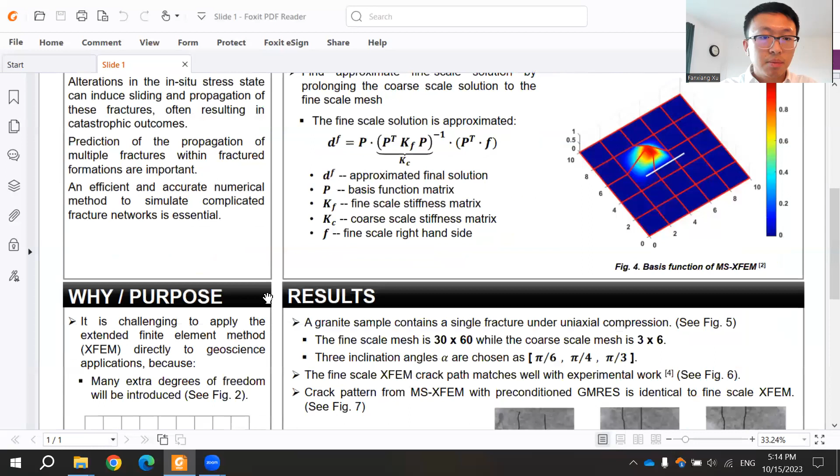There are still some challenges involved in simulating the fracture networks. Normally, for these complicated fracture networks, we prefer to use the extended finite element method, or XFEM. Since it is a very efficient strategy, it allows us to use simple structured grids, like shown in figure 2 here, to simulate very complicated fracture networks. But there are still some challenges involved if we want to apply XFEM directly to geoscience applications.

Because in XFEM, extra degrees of freedom are involved in the final solution system, as still shown in figure 2. These mesh nodes with the markers on top of them are called the enriched nodes, and they are affected by the fractures. So to capture the discontinuities due to these fractures, we give extra degrees of freedom to these enriched nodes.

When the number of fractures becomes huge, as is often the case in subsurface fractured formations, we have very massive fracture networks. The number of extra degrees of freedom is also huge. That means the computational cost of using XFEM directly to simulate the subsurface formations is very high and unacceptable for geoscience applications.

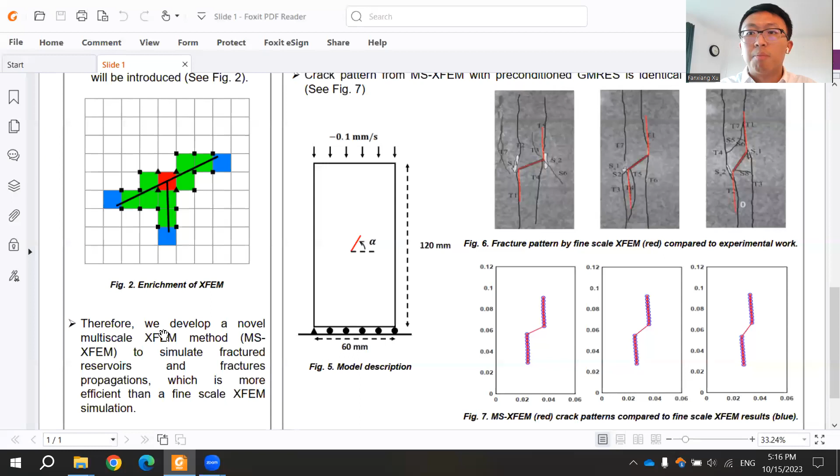Therefore, we developed a novel multiscale extended finite element method, or MS-XFEM, to simulate fractured reservoirs and fracture propagation. We want our method to be more efficient compared to fine-scale XFEM, but also as accurate as the fine-scale XFEM method.

So now let me introduce the MS-XFEM method. First, I want to mention what the multiscale strategy I'm talking about here is. Instead of solving the problem directly on the fine-scale mesh, like the black fine-scale mesh shown in figure 3 here, we want to solve the problem on a coarser mesh with fewer grid cells. That is what we call the coarse-scale mesh, like the red 2x2 mesh in figure 3 here.

Once we obtain the results on this coarse-scale mesh, we interpolate or prolongate the coarse-scale results back to the original fine-scale mesh. This interpolation process requires a key term called the basis function matrix. In the MS-XFEM method, we compute this basis function matrix based on the local 2D XFEM problem in each coarse element.

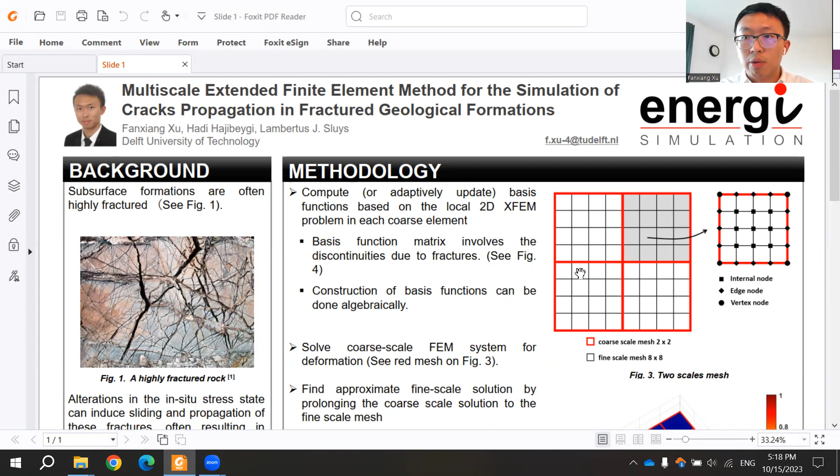This means when we construct the basis functions, we involve the discontinuities or the fractures information into the basis functions matrix. And this process of construction can be done algebraically instead of solving the local problem in each of the coarse 2D elements. There are two good reasons why we do this way to construct basis functions.

First of all, as I have said, when we interpolate the results from coarse scale back to the fine scale, since all the discontinuities have been involved in the basis functions, the final interpolated solution contains these discontinuities, since we don't want to lose details or accuracy in the final solution.

And the second reason is that since all the extra degrees of freedom or discontinuities have been stored in the basis functions, when we construct the coarse scale system, we do not need any extra degrees of freedom or discontinuities information. That means the coarse scale system we construct and compute on the coarse scale mesh is a coarse scale finite element system instead of a coarse scale extended finite element system. In this way, we reduce the size of the system we use to compute significantly.

And finally, as I said, the step is to compute the solutions on the coarse scale mesh and prolong the results of the coarse scale solution to the fine scale mesh. When we simulate the fracture propagation, we only need to update these basis functions locally and algebraically where the fracture geometries change.

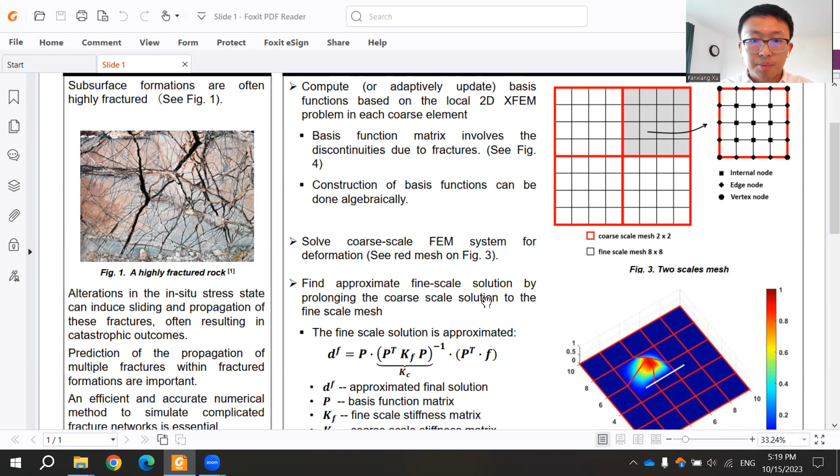This whole process can be summarized into one mathematical equation. Here, P is the basis function matrix as I have described. To construct the coarse scale system, or coarse scale stiffness matrix KC here, we use the transpose of the P matrix times the original fine scale stiffness matrix KF times the P matrix. Then we can obtain the coarse scale stiffness matrix.

Also, we use the transpose of the basis function matrix times the fine scale right hand side. We will have a term in this bracket that is called the coarse scale right hand side. The inverse of the coarse scale stiffness matrix times the coarse scale right hand side is the coarse scale displacement solution that I just talked about. And the final step, as I've said, is to use the basis function times the coarse scale solution we just obtained. We will have an interpolated fine scale solution.

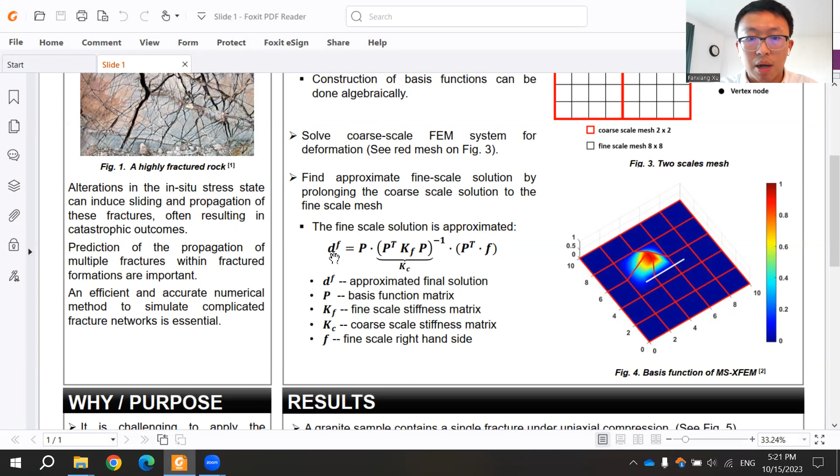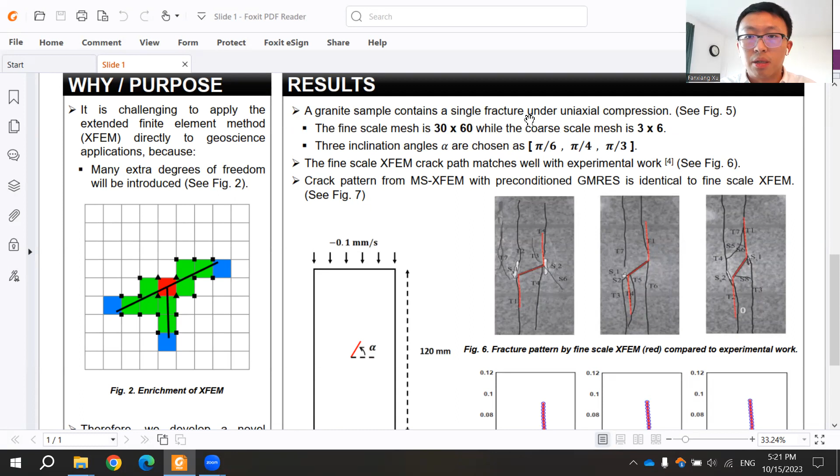Finally, I will show you one test case to check how MS-XFEM can perform when simulating fracture propagation under compression. This is a granite sample test that contains a single fracture with different inclination degrees, under the uniaxial compression test. This test is based on this paper, following all the parameters and the setup. If you're interested, you can have a look. Number 4 here.

The size of the granite sample is shown in Figure 5 here, and at the top there is a displacement rate control compression loading. The fine scale mesh used in this test case is 30 by 60. And for MS-XFEM, we want to simulate this problem with only 3 by 6 elements. Three subtests are also included here by changing the inclination angles from 30 degrees to 45 degrees to 60 degrees.

First of all, we simulate the wing crack propagation path using only the fine-scale XFEM strategy. And we want to see how this result can match with the experimental work from the paper I just showed you. And you can see the main wing crack paths simulated using fine-scale XFEM match well with the experimental work.

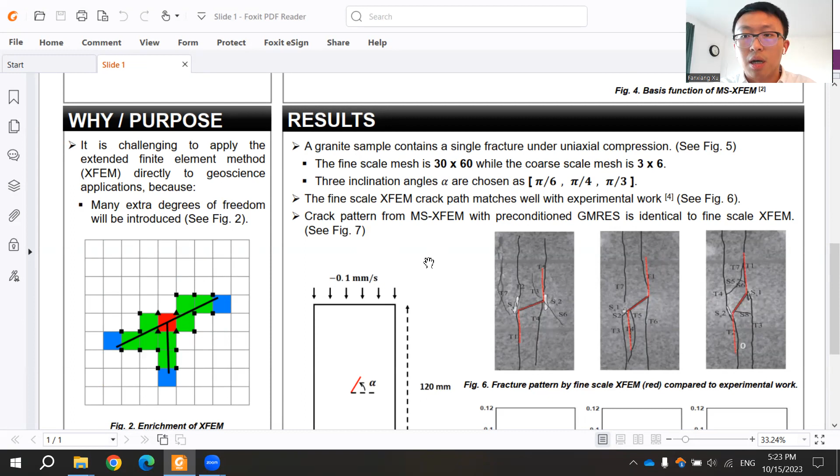Now, if our MS-XFEM can simulate the crack path identical to fine-scale XFEM, that means MS-XFEM can simulate the crack propagation under compression very accurately. And this is indeed the case, shown in Figure 7: the red crack patterns, simulated from the MS-XFEM method, are almost identical to the blue crack patterns simulated from fine-scale XFEM. So we can conclude that MS-XFEM can simulate crack propagation accurately and efficiently.